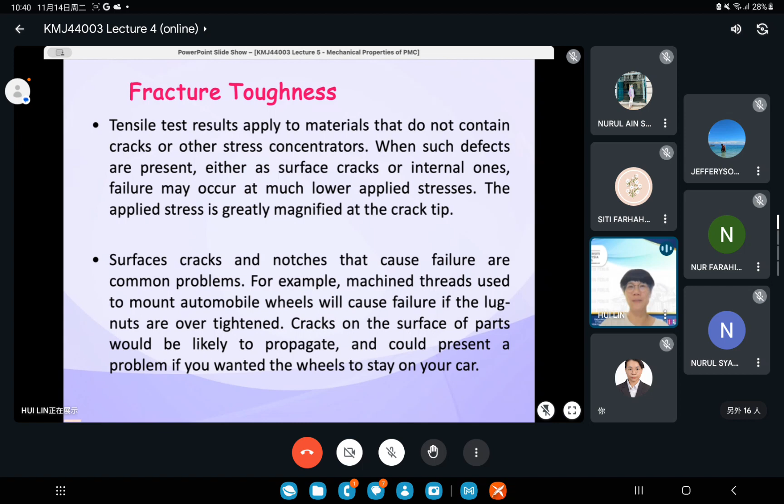So sometimes, in a certain scenario or situation, we can't avoid that there's already a crack. So how do we know how long this crack will not propagate? It could be that the crack is just a minor one, so it doesn't actually affect much of the performance of the material.

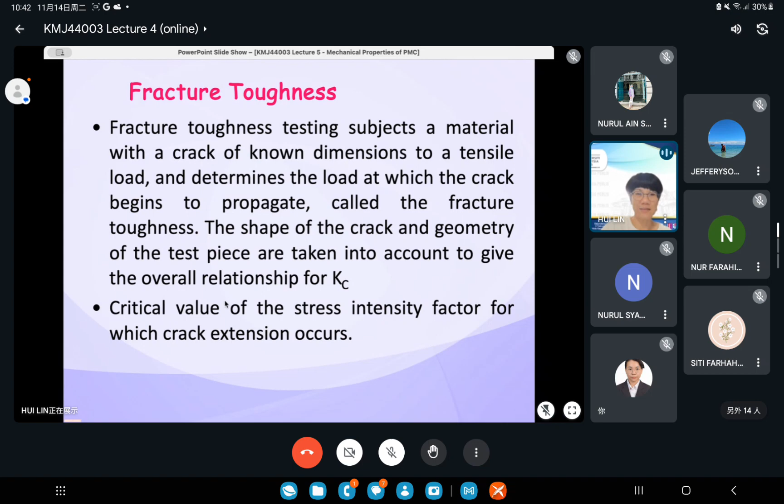So good, I have one more slide to share, then it's done. Critical value of... okay, then we come to this.

Grief... this is the scientist name, Professor Griffith. He proposed that an existing crack will propagate when the release of elastic strain energy is at least equal to the energy required to create a new crack surface. So all the time, if there is a crack, energy from the two surfaces will be extra given.

This one actually is an internal crack. Internal crack is very difficult for us to know using our naked eye. So internal crack usually will be determined using the non-destructive test.

So next week, our last topic of learning will be what I can say is the non-destructive test. Non-destructive test is actually more to let us know about the internal failure - that would be the main objective, rather than what you have learned for the short performance test, or what you call the destructive test. The destructive test is more on later on. Later we talk about non-destructive.

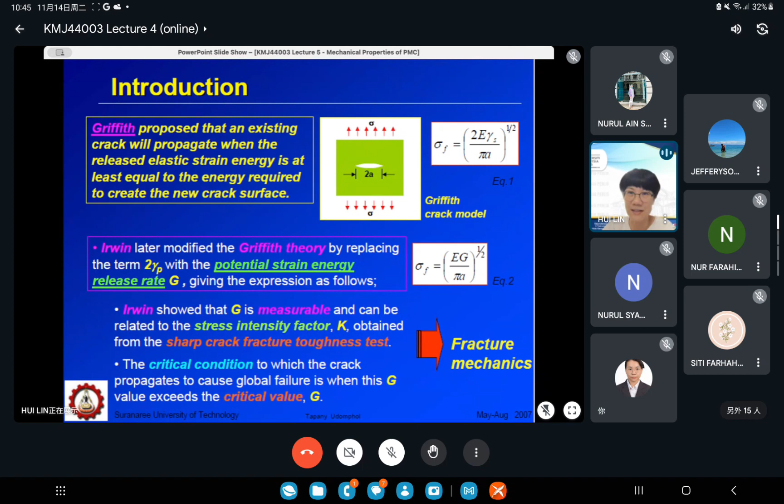So this one is common sense, right? The crack energy itself - if you put more energy, of course it will crack faster.

Talk about the stress intensity factor. This equation is important.

Stress intensity factor, KIC, can be described as the fracture toughness of material. This KIC is fracture toughness under the condition of brittle fracture - meaning it is not what you call a ductile fracture, it is a brittle fracture. Why? When in the presence of a sharp crack, meaning the crack is quite sharp - something like this, not this one. This is a sharp crack, not a round shape of crack, but like a needle-like crack.

Under critical tensile loading, meaning the load given is also very, very high - so under these three conditions, the stress intensity factor, where we can say the fracture toughness is the critical stress intensity factor, in the mode 1 failure. So this one is the mode 1 failure. AC is the critical crack length, this one, the crack length.

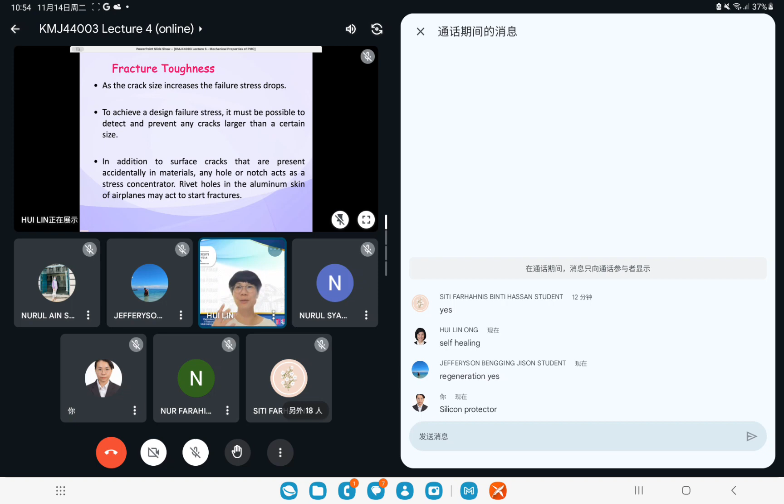So some of the researchers, when they find out there's a crack, basically they will put the self-healing material into the crack to prevent the propagation of the crack. Thank you, Chairman and Jeff.

So basically, the most commonly used self-healing material is epoxy. There has been a lot of research done using epoxy as a self-healing material. Of course, there will be a different type—we call it composite material—together with this epoxy to be the self-healing agent.

Thank you, Chaimei, good try. Silicon is a protector, as you already said, right? I'm not sure whether silicon is also used as a self-healing agent or not, but the majority in the market is made from epoxy. But I think silicon perhaps yes—I am not sure, but maybe yes. Maybe it can't be standalone, it will be together with epoxy. Yeah, because silicon is flexible, so that's one of the good candidates for self-healing.

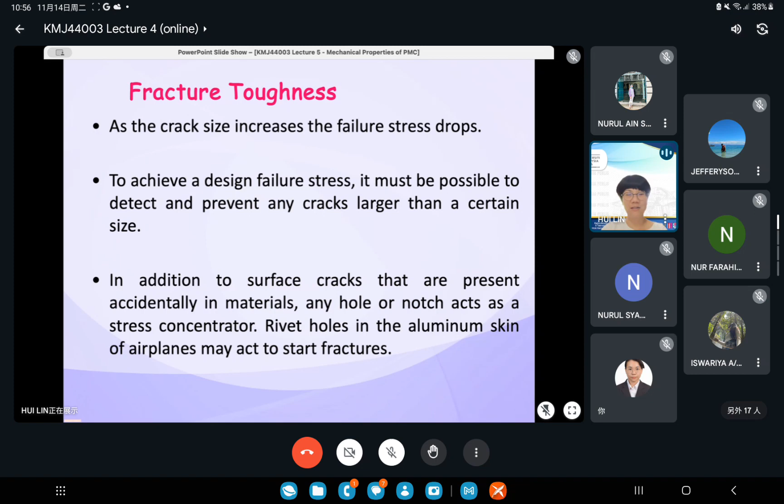Okay, so as we just mentioned, we try to produce polymer composite material with high ductility—high ductility material. So the ductile material will have good elongation and good strength. So then the material should have better fracture toughness.

Okay, so thick and rigid material usually has a lower fracture toughness than thin material. Anyway, to me, it does not necessarily mean the thin material will have a higher fracture toughness compared to thick. If the thin material is rigid, meaning it is kind of fragile, it will also have a low fracture toughness. For example, glass material, ceramic material—although thin, it still has a very low fracture toughness because it is rigid and fragile.

Okay, so then we can increase the rate of application of the load, which reduces the fracture. Somehow when we apply the load—I mean you do the tensile test to confirm the fracture toughness if there is a crack—so if we quickly use a high speed of load, the fracture toughness will be reduced. This is research that has been done by researchers, also they can play around with the speed of the load applied, and then you will see a different answer.

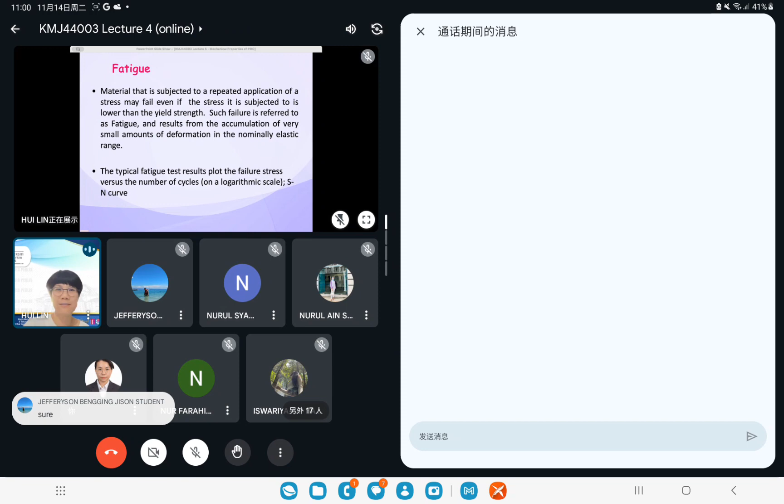Right, so let me check the fracture toughness. Just a very simple one. Very simple, basic—let me try first.

Welcome to Fracture Synopsis. Let me share this—fracture toughness is actually one of the topics in mechanics. You've learned mechanics, right? Essentially it's one of the topics about mechanics. Let me share the screen—not the screen, but anyway, a window.

Wait, kids, not... okay. You can see this, right? Are you able to? Yeah, okay, you can see. Good, so I'm going to play the video, okay?

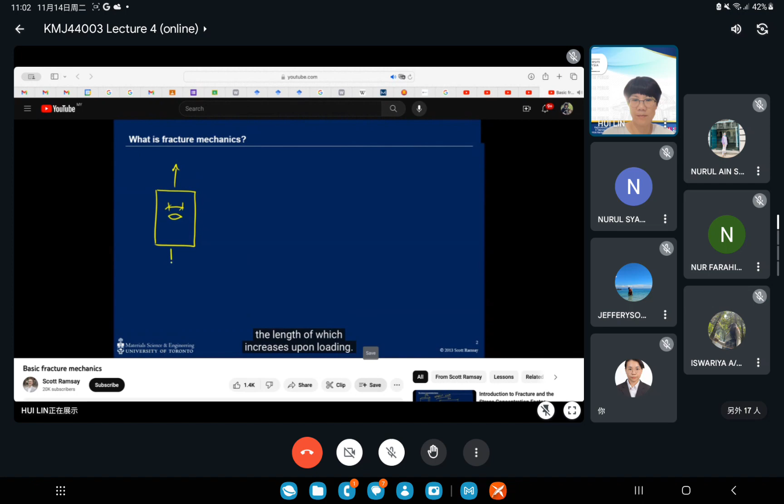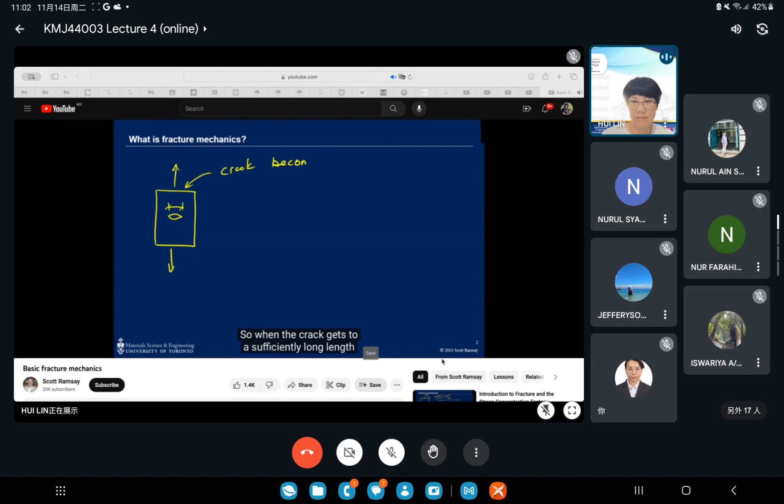We'll have a basic introduction to fracture mechanics. The first thing to address is, of course, what fracture mechanics is all about. Remember from Synopsis 1 that fracture involves a crack of some length, the length of which increases upon loading. Fracture mechanics is about understanding when that crack becomes critical—when it gets to a sufficiently long length that the crack propagation goes from being stable to being unstable. It turns out we can describe fracture mechanics in its basic sense using this equation here.

This is known as the stress intensity factor. And that relates the stress and the crack length through this geometric factor here—a function of the sample size and the size of the crack. So this is a very useful equation for us, and as I said, it's the basis for fracture mechanics.

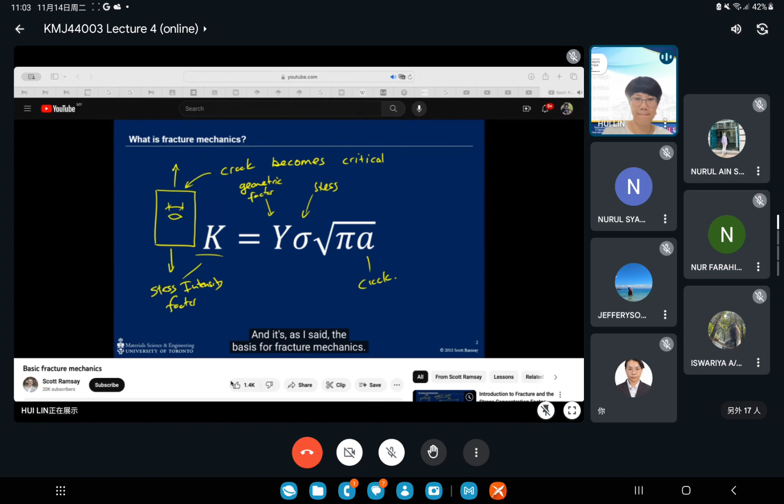I think to help understand the stress intensity factor, there's a great little statement in Hertzberg—an excellent book he's written on fracture and deformation. The statement is: stress is to strength as stress intensity factor is to fracture toughness. Let's explore that.

We've seen earlier in the course a stress-strain curve, and on that curve we identified a number of points: the yield strength, the ultimate tensile strength, and the fracture strength. Remember we called them strength values, strength being a specific value of stress. So now we have the stress intensity factor K, and a specific value of that is the critical stress intensity factor.

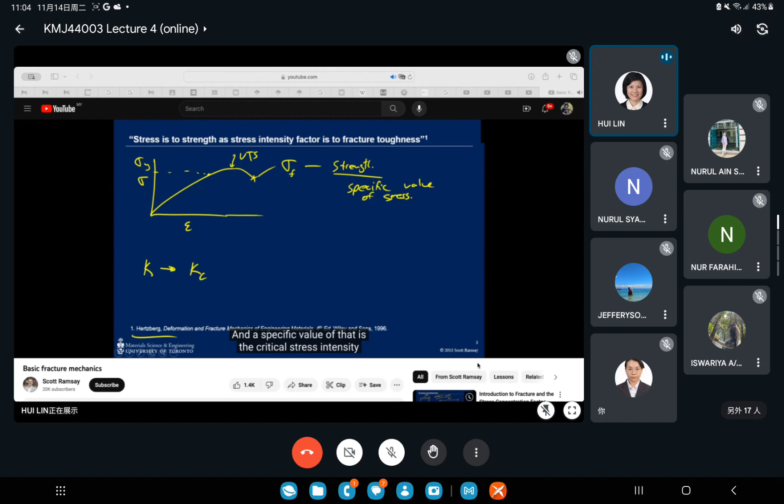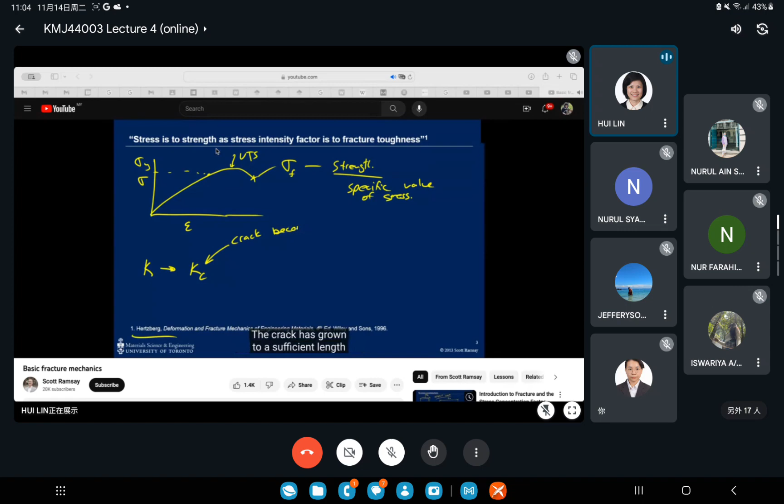That is the stress intensity factor when the crack becomes critical—the crack has grown to a sufficient length that it is critical, meaning the propagation is now going to become unstable. More specifically, we're going to look at the most common form of the critical stress intensity factor: the plane strain fracture toughness, K1C.

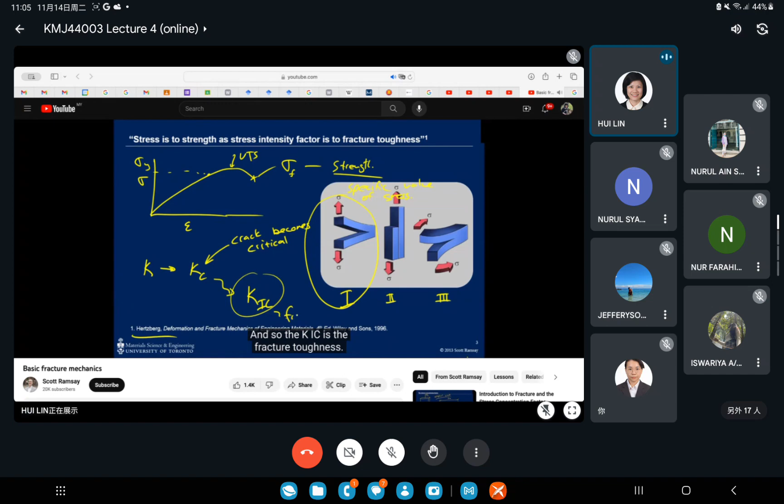The Roman numeral 1 refers to mode 1, crack displacement—that's crack opening. Just out of interest, mode 2 is sliding and mode 3 is referred to as tearing, but mode 1 is what we're interested in—the most common form of crack displacement we'll encounter. So K1C is the fracture toughness, and remember that the fracture toughness is a specific value of stress intensity factor.

So the last thing I'd like to address is this clarification. We've covered a number of things here. Stress concentration factor, covered in Synopsis 1, was K sub T - the stress concentration factor at the crack tip. That was the ratio of the maximum stress at the tip of an elliptical crack, in our case, to the applied stress. So stress concentration factor tells us how much the stress is concentrated.

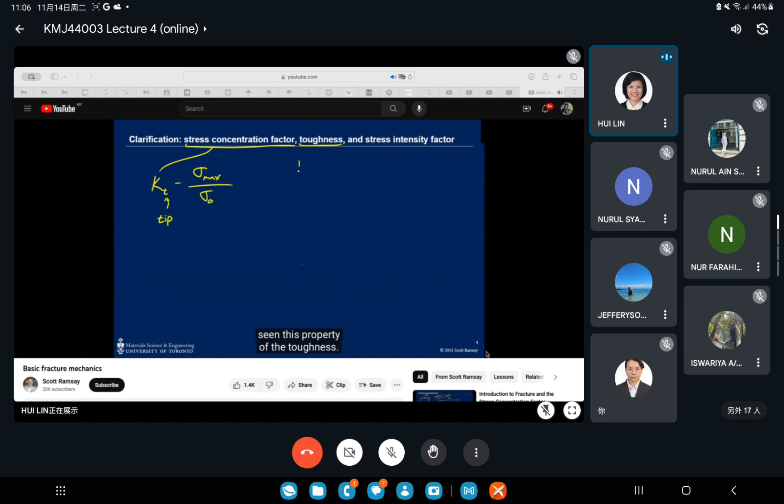Now, earlier in the year we saw this property of toughness, defined as the area under the stress-strain curve up to fracture. That's essentially how much energy is involved in breaking and fracturing a sample. It's somewhat related, but it is a different term to this new term we've just introduced.

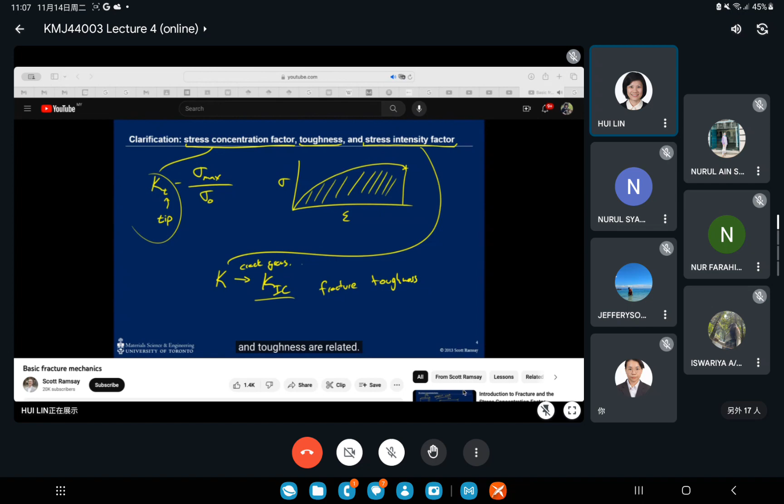Which was the critical stress intensity factor. Remember, the stress intensity factor K, when it becomes critical, the crack grows, and we have a specific value of the stress intensity factor under the right conditions, which we call K1C - that's the fracture toughness. So it's important to realize that fracture toughness is different from toughness, the area under the curve, and K1C is also different from the stress concentration factor. So stress intensity factor, stress concentration factor, and toughness are related, but they are each unique, and it's important to appreciate that difference.

Fracture mechanics is about understanding when a crack becomes critical. We have this relationship for fracture mechanics. The stress intensity factor, under specific conditions, when it becomes critical, is known as the fracture toughness - a material property, a function of the material chosen for the application. Stress is a function of the design or application, and this is the crack size, which could be determined through non-destructive testing or could be a function of an element of the design or processing conditions.

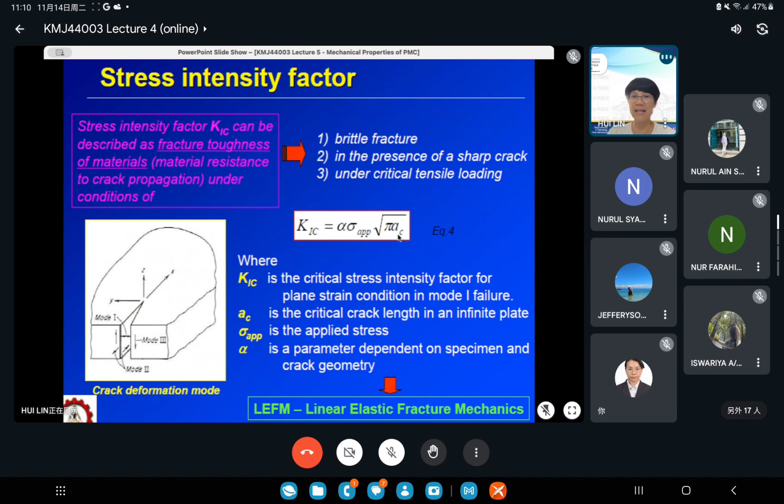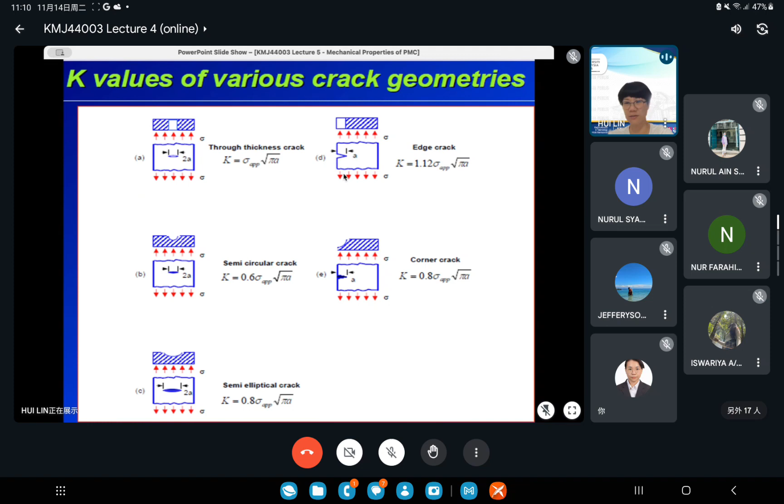Now, some factors on how we design a material to have a high fracture toughness or better fracture toughness. For fiber reinforced polymer composites, it is always advised to have a small diameter of the fibers - this reduces flaws. We should have composites with good ductility, good elongation, and at the same time good tensile strength. If a material is very rigid and fragile, of course the fracture toughness is low.

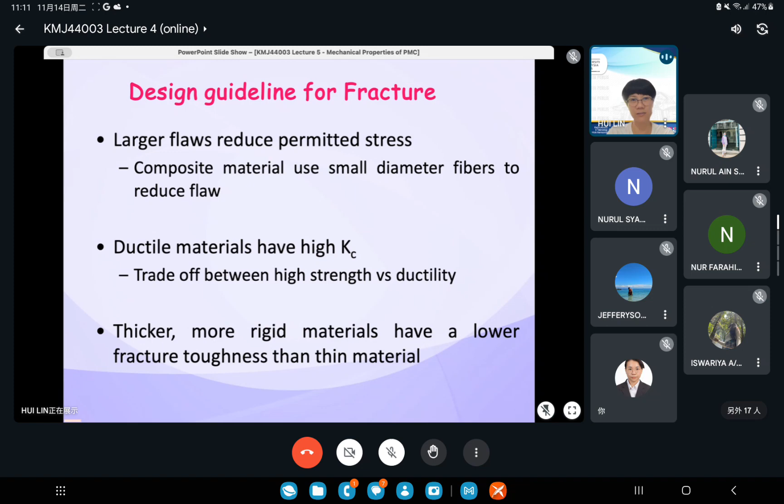Another way is during the mechanical test, example a tensile test, we can reduce the rate of the test load. We can also increase the temperature a little bit, so the material becomes more flexible, and the fracture toughness will be higher. For ceramic and metal materials, it would be good to produce them with a smaller grain size, so they have high resistance to fracture and a high value of fracture toughness.

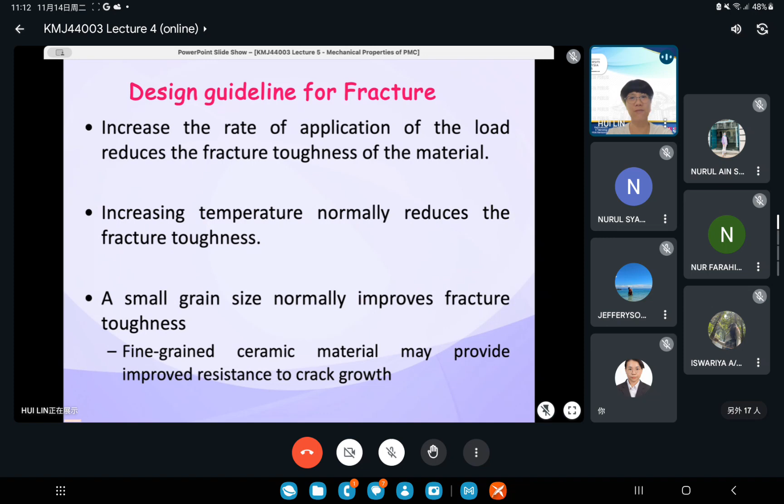Okay, so now we move to fatigue. Fatigue is something you've heard about, right? In our human body, we sometimes say 'my body is fatigued, I feel tired,' something like that. Fatigue relates to long performance tests, meaning it takes time to get the result - for example, it may need 1 week, 1 month, several weeks to a year. It's a continuous type of test.

We can perform the fatigue test using a tensile instrument, but that tensile instrument is a dynamic instrument, meaning it moves like this, back and forth.

This is the tensile machine, right? You usually pull this up. This is our specimen holder, we hold it here. And then the tensile machine only keeps pulling, goes up, up, up, up, and then it breaks, correct?

So another type is a dynamic tensile test: pull, release, pull, release, pull, release. This type of test we call a dynamic tensile test, and it is for fatigue purposes. It will take some time. Researchers often say they do like 100 times up down up down, but that isn't really called fatigue yet.

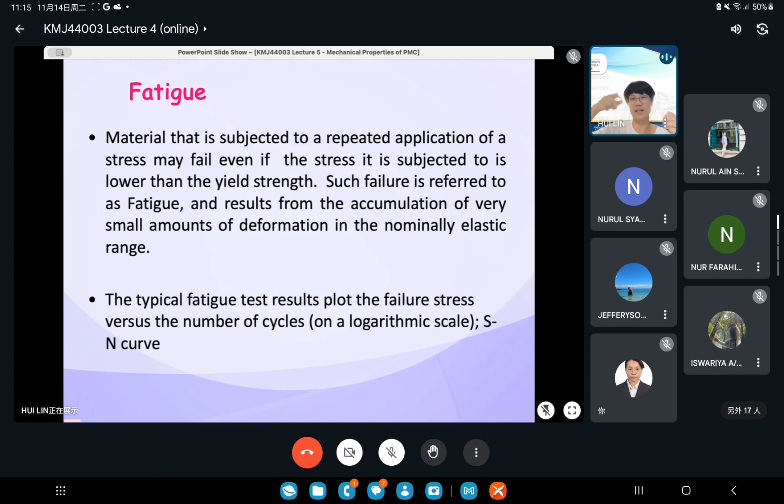Fatigue is an important cause, and here no failure occurs, there's no crack inside or outside the composite material. We assume this is a perfect condition, the composite material is in its perfect condition.

Fatigue is an important cause of failure in many cases because it can form cracks that grow until they are large enough to cause a fracture toughness failure. Fatigue can result from cyclical application of tension and compression. So either we keep tensioning or compressing many times like this, in different situations.

When we place our polymer composite material in a different situation, with a continuous kind of tension or continuous compression, bending or tension, then for sure it will encounter failure, but we don't know when. That's why we have to determine the fatigue strength.

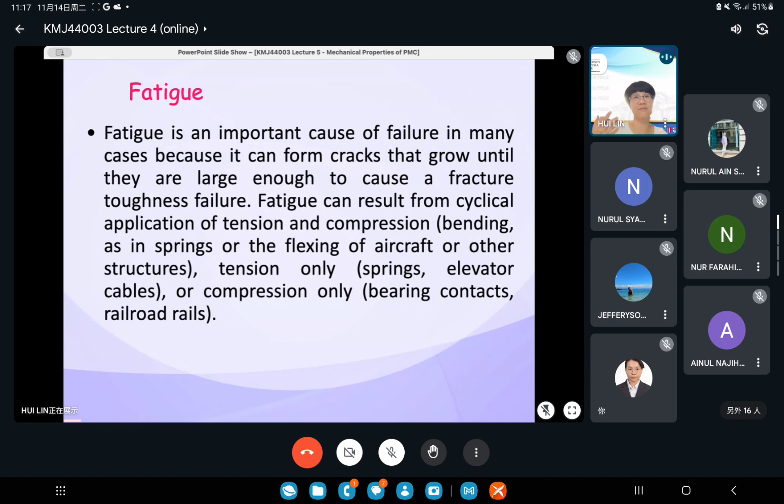For example, it happens to aircraft, it happens to railroads, the railway always suffers fatigue. It keeps continuous cycling, many cycles, more than 1,000, 100 cycles, thousands and 10,000s.

So here we did a comparison of stress over the cycles: 1,000 cycles, 10,000, 100,000. 10 to the power of 3 is 1,000. So 1,000 cycles up to many thousands.

After thousands of cycles, under tension for example, you see the carbon epoxy polymer composite has the highest fatigue strength compared to all these types of metal. Metal will keep deteriorating after long cycles.

You'll see how superior this polymer-based composite is. We need the carbon fiber to be a long fiber with a narrow diameter, a small diameter, so it only happens like this. This is carbon fiber, not glass fiber.

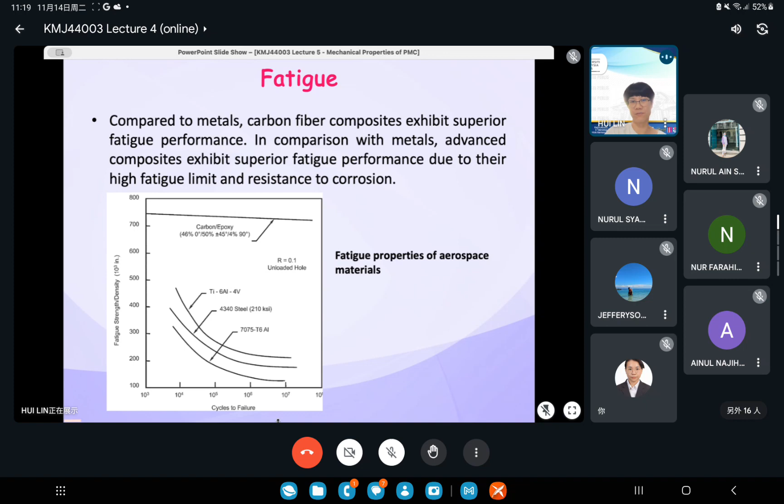Carbon fiber is very superior together with epoxy, because we need something to protect the carbon fiber, so usually we use epoxy to glue them together and protect it. Very amazing, usually used for aircraft application, for bridge construction, big bridges, aircraft. A very superior type of material, it has very high fatigue strength over a period of cycles to failure.

Okay, so this is the explanation of the previous figure. Carbon fiber, superior, blah blah blah, since high performance, so I have been explaining this.

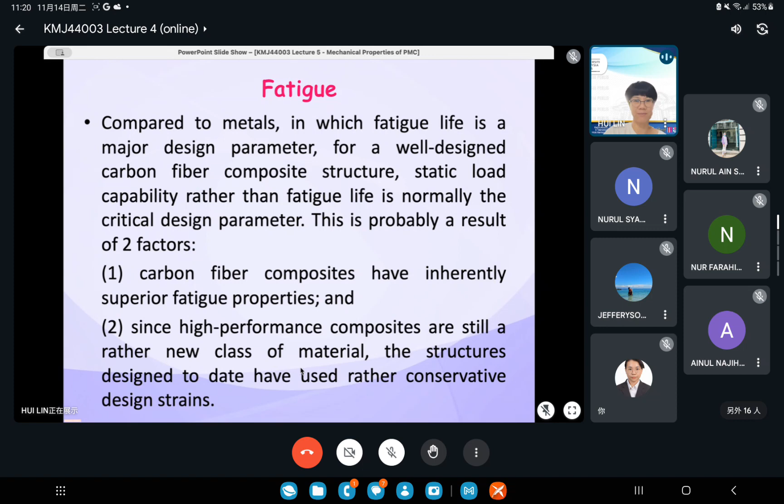Fatigue failure in metal versus fatigue in composite is considerably different. Instead of one discrete crack, composites can have many types of cracks that may link up and cause failure. So there are 5 major damage mechanisms. This is important.

For a single material, the fatigue failure mechanism is quite easy - it just propagates slowly until it fails. But for polymer composite, there are several damage mechanisms - 5 major damage mechanisms happen.

First it comes with damage of the matrix, because imagine this is epoxy with carbon fiber. Of course the load starts to transfer from the matrix first, right? Load transfers from matrix to fiber, so of course the damage will start from the matrix.

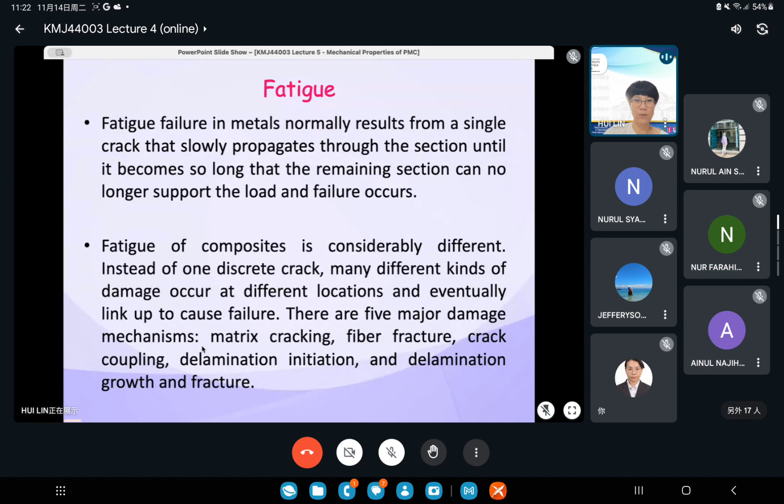Well, let's talk about this. For the first phase, the matrix will crack. This is very easy to understand and very easy for you to explain.

And then, although strength is lost, in addition the matrix crack opens to the surface, and they can provide a path for moisture ingression. So when the matrix cracks, it opens the path for moisture to enter the matrix, along with sunlight.

If we place things in an outdoor area - even indoors we have light, which is also UV, and we have fan, the wind, and then we have humidity, water molecules surrounding. So they will enter this polymer crack zone, and this will actually accelerate the crack.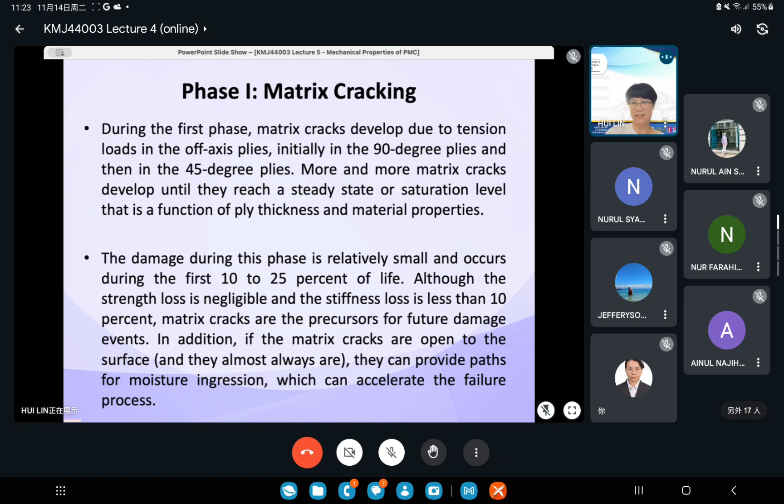Then the second phase, it will go to the fiber fracture. Let me check the fiber fracture. So fiber fracture - it doesn't draw this one off. Fiber fracture only goes to the crack coupling.

So phase 2 is the fiber fracture, crack coupling, and delamination - it consists of 3 phases. Then when the matrix fractures, all the matrix has fractured, so then it starts to attack the fiber with extensive crack.

Actually, to be frank with you, it's not the fiber first - actually it's the matrix and then the interface. The interface between the matrix and fiber will start to fail, because we learned interfacial adhesion is very important, right? So it is a barrier before the failure goes to the fiber - the interfacial bond between matrix and fiber should start to fail first.

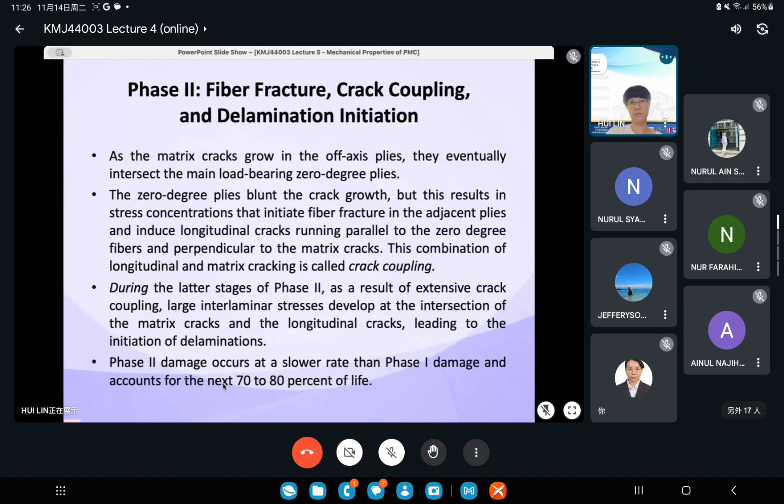Then the third phase - it goes to the fiber when the barrier between the fiber and matrix has gone. With no barrier already, the crack will directly pass and extend to the carbon fiber. Then the carbon fiber totally fails.

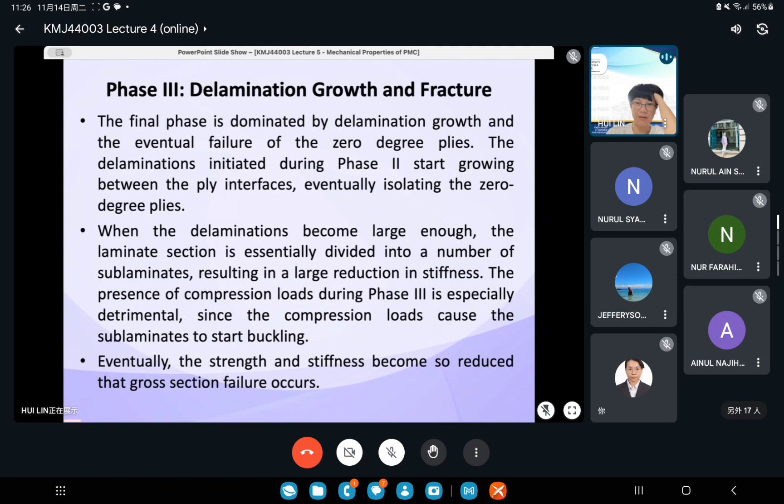Then, of course, delamination grows, and the failure - the whole composite will totally break into two. That is what I think you can write something like this. So this is the picture.

So the crack coupling is the interfacial, so the delamination, and then the fiber break. You can write a very short or brief explanation of this by drawing this figure. Then you will get full marks for the fatigue damage mechanism.

How to explain the mechanism - actually the mechanism is quite simple. I repeat, we start with the matrix - the matrix starts to crack. Then the cracking continues until the coupling, the interfacial between the polymer and the fiber, or I can say fiber.

So then when there's no protection anymore, the protector also being destroyed, only then the crack will start going to the carbon fiber. Carbon fiber slowly delaminates - you call it delaminate because the fiber is usually laminated, glued with the polymer matrix and with the protection of this coupling agent. So now no more - when there's no more protection, delamination starts to occur, the carbon fiber becomes weaker, they become single together, not stuck like this bunch anymore.

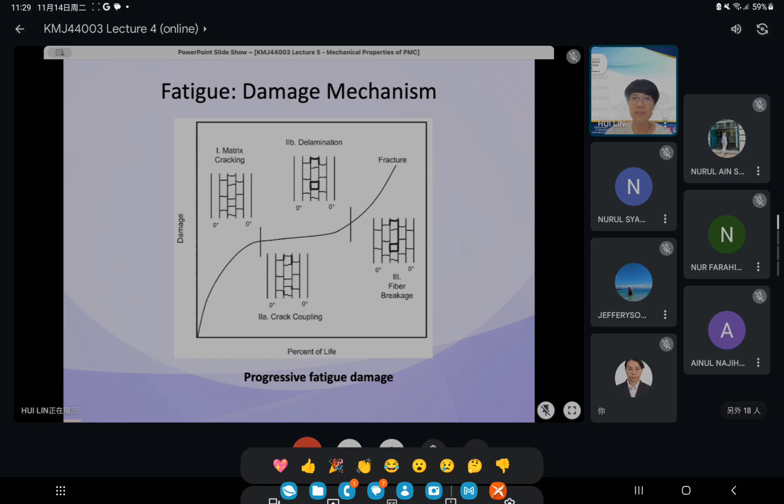Okay, so this is about fatigue. I will give you an example exercise, the question tomorrow when we have the physical class, because without showing you the exercise you cannot imagine. The exercise is about tensile, but with many cycles.

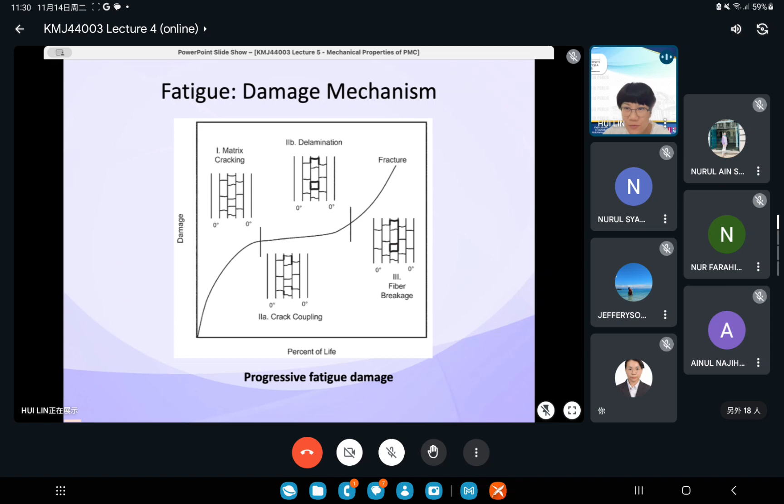So we move to, do you want to take a rest before we go to the last one, or we can just proceed? Okay, we'll proceed. I talk quite slow, right?

Now we proceed to creep, the last one. Creep is not about the load anymore, creep is about the length. We call it the dimensional stability or the length of the material. We observe the changes of the length when there is a load applied to them continuously. This is a long-term performance test again, and creep is usually used to determine the viscoelastic property of material.

Guys and girls, do you still remember we learned this together in your second year, in the subject of structure and polymer properties? There is one topic we learned about viscoelastic. Do you still remember? Just a little bit of revision, I want to ask, this word comes from two words, right? Visco and elastic. Can anyone explain, just a very simple one, what is the meaning of viscoelastic?

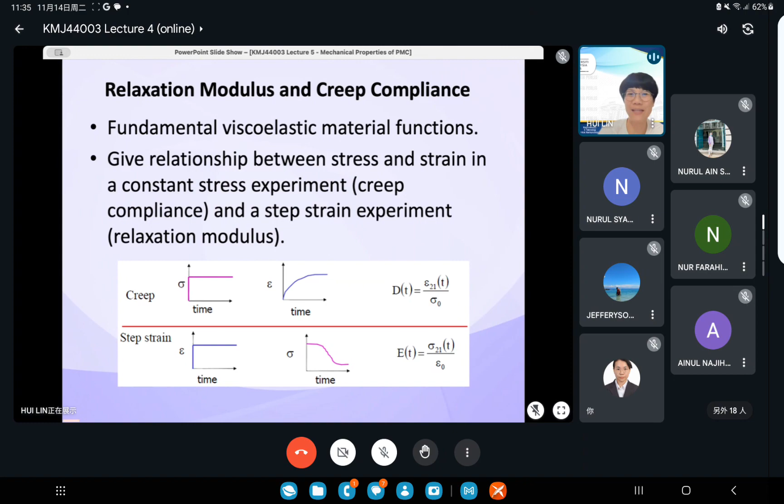Okay, let us settle this. The answer is yes, not maybe. Yes, correct, so it's not maybe. Science, we cannot, science is very straightforward. Learning science is very straightforward, it's not learning arts.

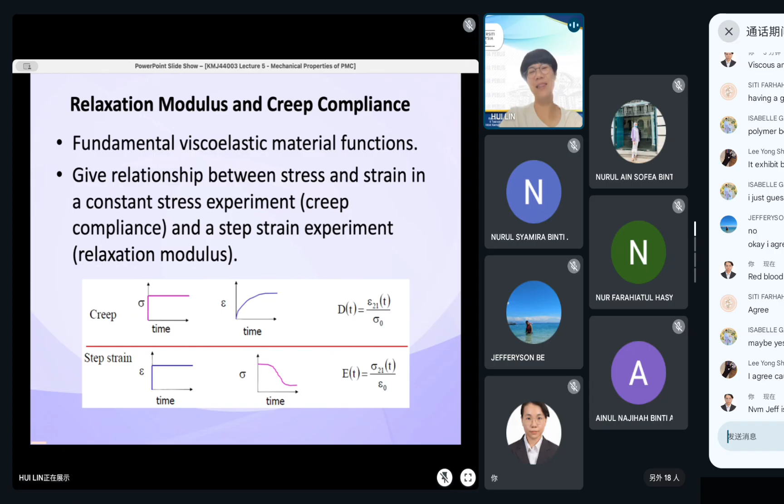They won't tell you maybe like this, maybe like that. Those who are good in science are very precise, okay. But people in arts have a lot of maybe, maybe. Art is kind of very unpredictable, full of imagination, right? There's nothing totally wrong or totally right. Anyway, I have many friends who love both - they're good in science and they also love arts. They're somehow quite special when you communicate with them, they have both characteristics.

So talk back to the science - yes is yes, no is no. Okay, so imagine ourselves, we human beings, we are viscoelastic material. We have two things in one - we have liquid and solid in one at this ambient situation, not purely liquid. Same goes for the majority of materials, it's just maybe you can't imagine it in a straightforward way. For example, all types of polymers are viscoelastic, all types.

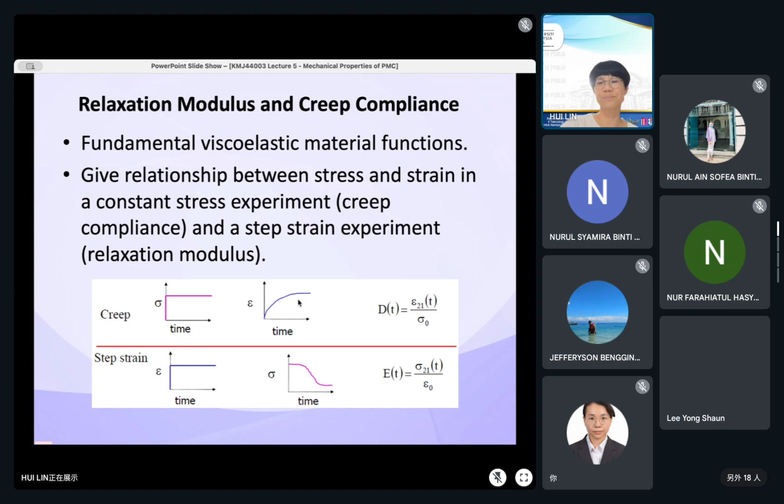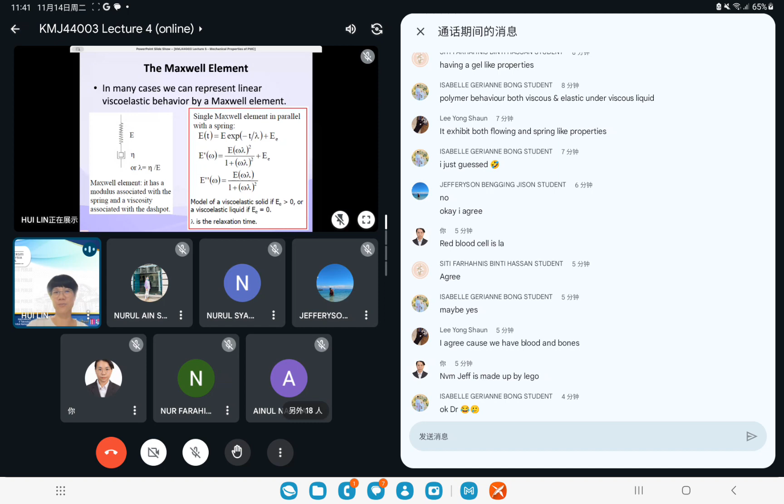So just now Shaun mentioned about the spring - maybe he already flipped through this slide. So we also learned this in your second year, right? You have a spring with a dashpot. Spring is a solid behavior, dashpot is a liquid behavior. Combination of these becomes a Maxwell element. Then we have another one, the Voight. There are two - you see the arrangement of the dashpot and the spring is different.

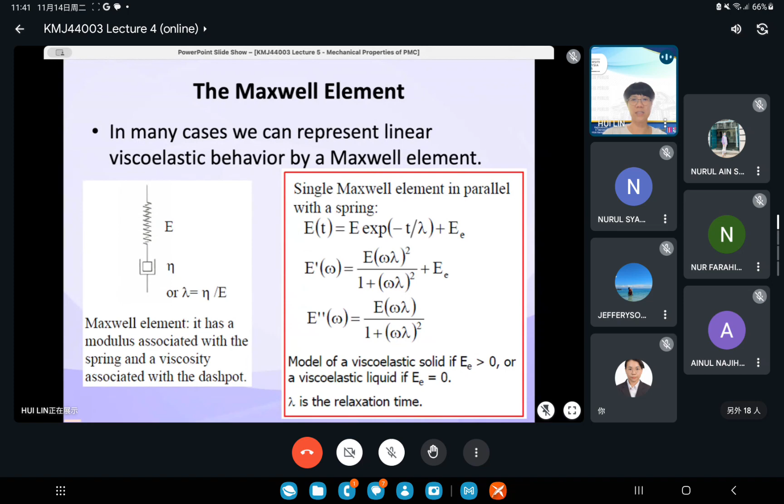So this one is in a linear style, right? And this one is on the opposite side, we call it the Voight element - dashpot here, spring is here. I only show these two because you have learned before, there's a more complicated kind of combination of the spring and dashpot. When I showed you in your second year, they were more complicated. But anyway, this is a mechanical model of a viscoelastic material.

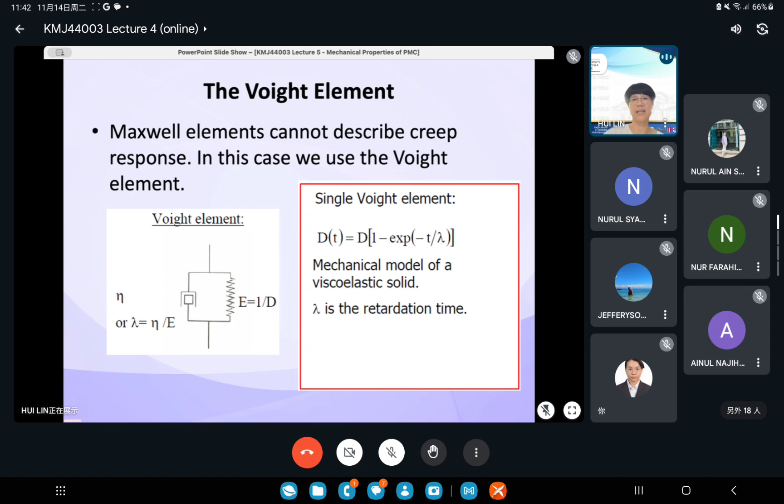No, so for creep it's a very little bit of load, and then over a long period of time - strain versus time. So creep is a plastic deformation. You learn about elastic and plastic deformation, you remember I also asked about this in the test, no? I also emphasized it in class last week. So here, creep happens in the plastic region, resulting from a long-term load over a very long time, maybe several days, weeks to months.

I have a student previously who did this creep test for her master's degree. She did a good job because she extended the research from my PhD work - I didn't do some of the long performance tests, so she did them. She did creep and fatigue tests, two major long-term tests, because they take a very long time to do.

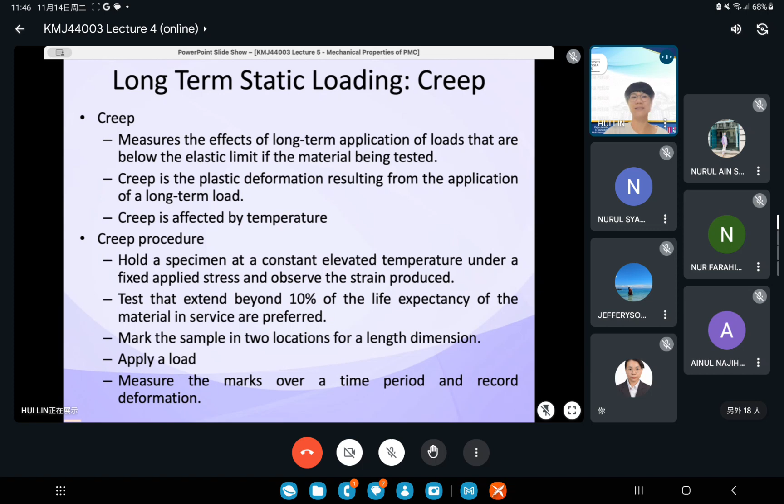So we measure the marks over time and record the deformation. This is a typical creep result. Creep is no longer measured in inches, but in centimeters or millimeters - use SI units. Creep is actually unitless because it is an elongation, meaning centimeter per centimeter, for example, versus time.

So a typical creep graph looks like this - this is a very obvious, easy, typical creep result. Some materials only show a straight line, which means the material is quite brittle - you don't get this secondary creep followed by tertiary creep.

The creep result is usually measured here, the steady creep over a period of time. This is a tensile test - at a constant load, we keep pushing it out, but at a very low load. We keep pushing it out like this, then calculate the elongation. The load is constant at a very low load.

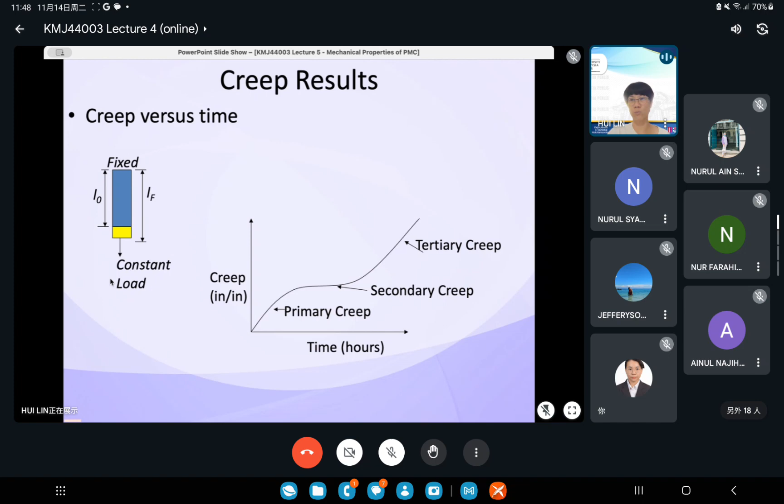So just now I showed that fatigue is important, right? For those who didn't attend the online class today, they know which one is important. Now, out of 36 students, I always get 20 plus attending. So you'll see this figure is important.

You may have to draw this and explain it - creep versus time. The creep will increase and then stay steady for a while, not dramatically, but increasing a little bit. This is a very steep kind of curve, and then it will steadily grow - the creep increases steadily, then goes up.

Now, first it's divided into 3 stages of creep. The first is dislocation of the composite, where the molecules move far away so it elongates very fast. The second stage is characterized by dislocations a steady rate of strain - this is what we're more interested in, this is the real creep. The third stage, necking happens, then it fails. So the second stage is the creep.

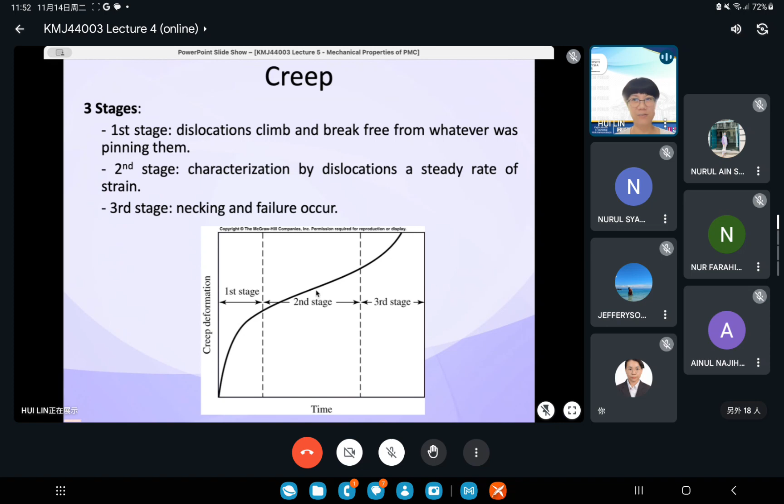Rupture time is the time required. Second stage is the creep. I want to emphasize this, it's important. There are 3 stages of creep, and the second stage is the real creep. First stage is what happened, third stage is what happened, and you have to draw this. If you just do this, you will get full marks already. Very easy, no? You don't need to give a long answer.

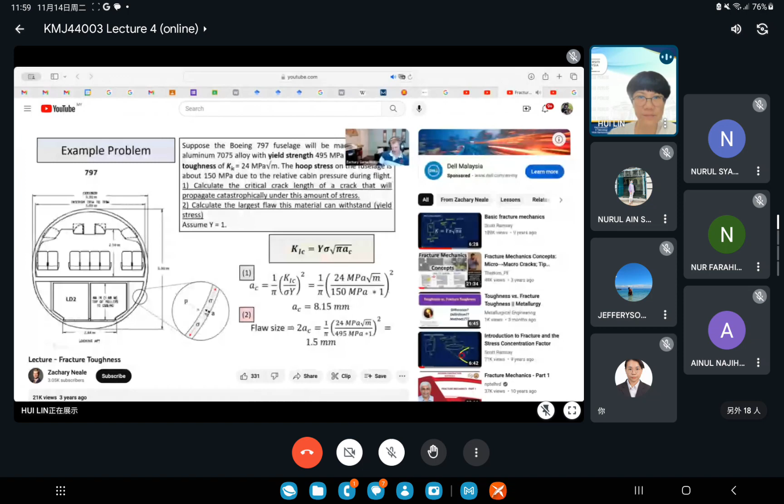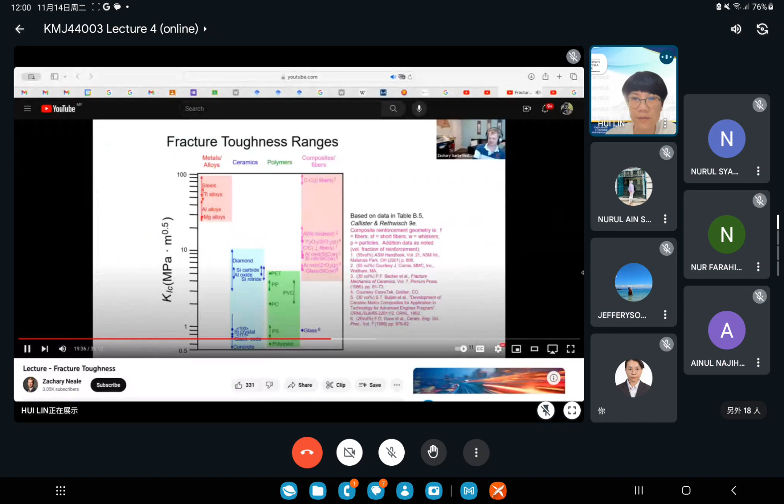QA here. So if you look at Callister, they have surface cracks which have a crack length of A, and then you can have internal cracks. This one, internal cracks have a crack length of 2A. So they're 2 times, showing like the energy was in the last question, definitely similar to the quiz. Okay, let's move on.

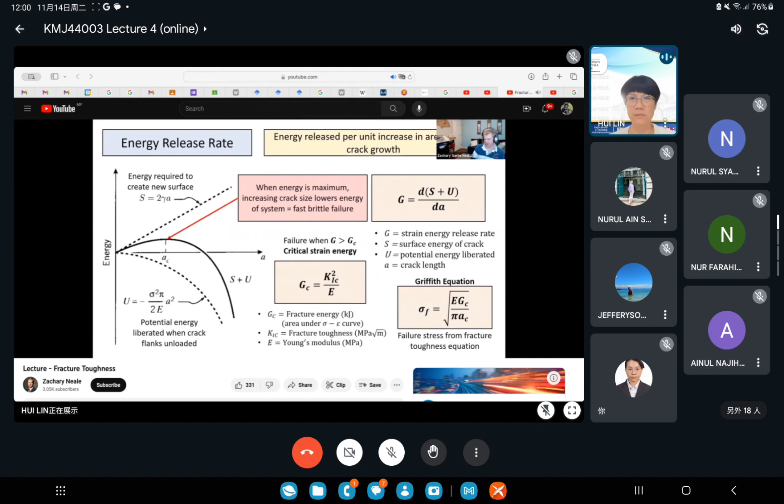Here's one more, some equations talking about fracture toughness. So this graph is showing the energy - if you have a crack and the crack was to grow, you need to give it some energy, and that energy is coming from the energy created by two new surfaces. Under tension, when you grow that crack, you're creating two new surfaces, two new interfaces. And then the counter to that is the potential relieved from the stress created on those bonds. So once you create that new interface, that stress is relieved - that's a negative potential energy. But in any case, there's this equation called the Griffith equation.

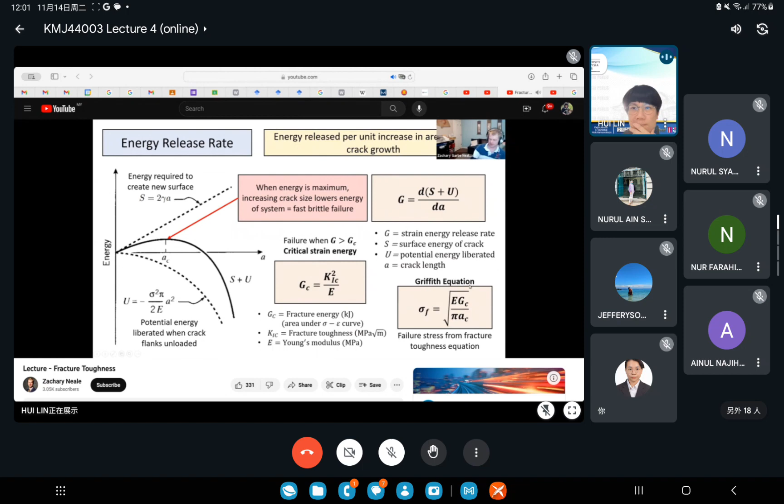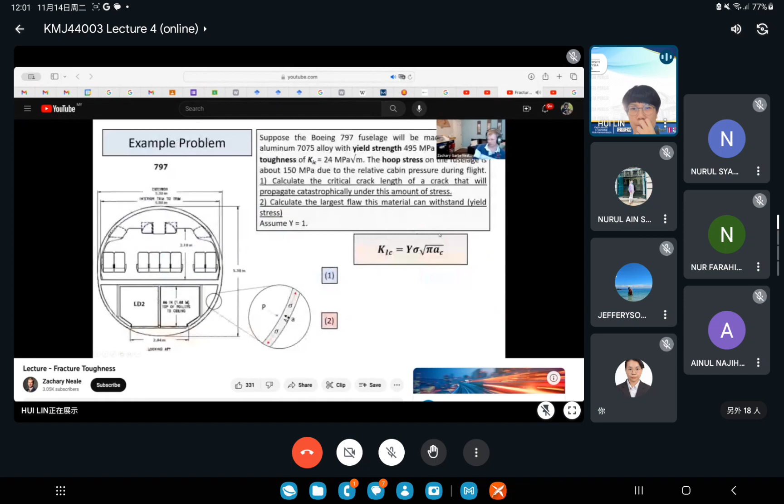It's very similar to what we saw previously, and this is in the book as well. It's basically the same equation, just they took the surface energy, 2 times the surface energy, and replaced it with this critical strain. But it's related to this next problem, which I think is kind of fun.

So we're using this equation this time to calculate for A sub C. What size crack is necessary under these normal operating conditions to cause catastrophic failure? Applied. Critical - he asked the student to do the exercise already. So multiply by 1,000. This is the answer: 7 centimeters.

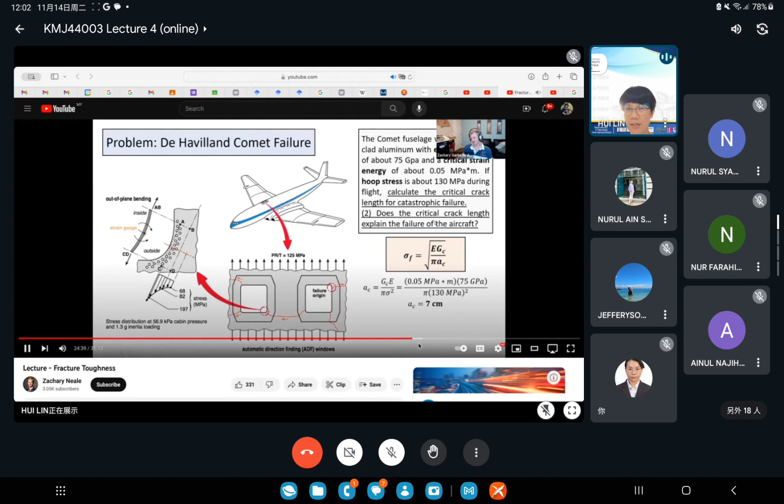So that's a really large crack, right? The last question, the hypothetical Boeing question, was millimeters - pretty small, but still pretty big. This one is 7 centimeters. The second part of the question is, does this critical crack length explain the failure under these conditions? Over many cycles, you'll have a maximum stress load and a minimum.

Example finished. Now this one is about the fatigue. I want to show the fatigue - you see the graph is like this, and some example problems from sinusoidal loading. So time is on this axis, this is the stress. Cyclic fatigue is kind of really interesting.

So you can imagine you have a part - tomorrow we will learn about this in the example question. But then over many cycles, this is the fatigue SN curve. So this is only one cycle - one cycle, only one cycle. Yeah, so you see only one cycle.

This is only one cycle. Up, one up, one down, one cycle. So it has many cycles actually, over time. So this is the fatigue - typical fatigue graph, something like this, no?